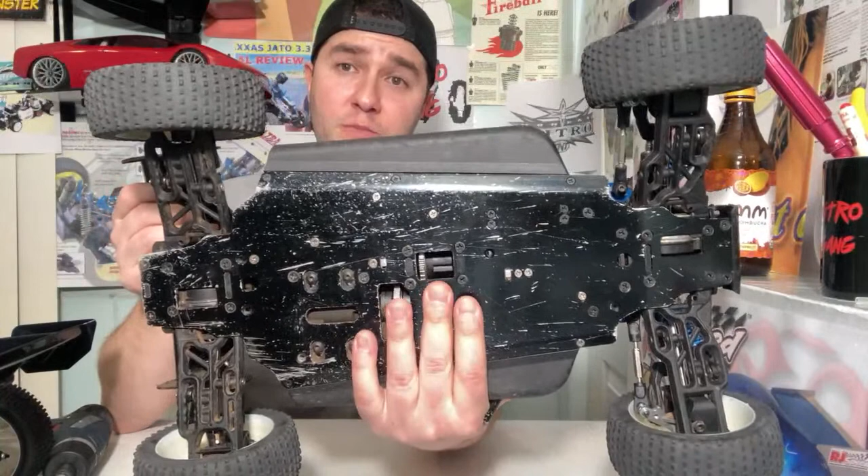So check this out, one interesting thing I noticed about this XTM: it does have the regular pan chassis, the metal spur gear, stuff like that. It also has a locked center diff. So if I spin the rear wheels, take a look at this, the front spins along with it. Right now I didn't do anything to this buggy since I got it, but I actually think this is going to be the first Nitro buggy with the center diff that's not going to piss me off. I sure hope that is actually the case here.

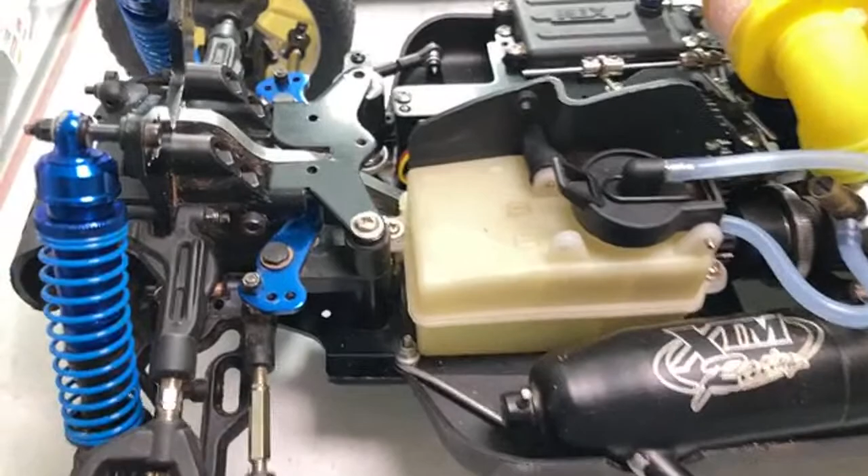Okay guys, so this is a fairly rare, at this point, XTM X-Terminator XT2. Notice it has a ton of aluminum all over. We have a very, very thick front aluminum chassis standoff, a stiffener, whatever you want to call it. I don't know what you call it. We have an aluminum steering link, metal spur gear as expected. The XTM...

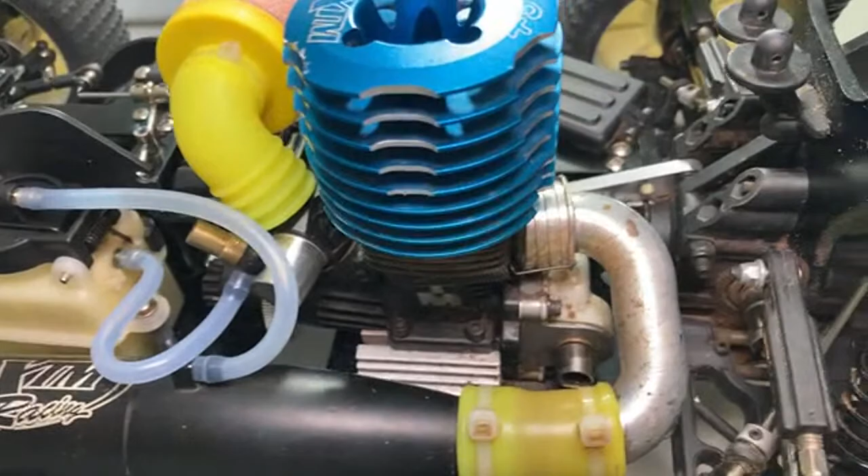451 engine. Now guys, I was doing some research on this motor, and I actually have a tab open with the horsepower. So if somebody wants to take a guess how much horsepower this XTM has, we're going to find out in a little bit, but we're just doing a little overview of it right now.

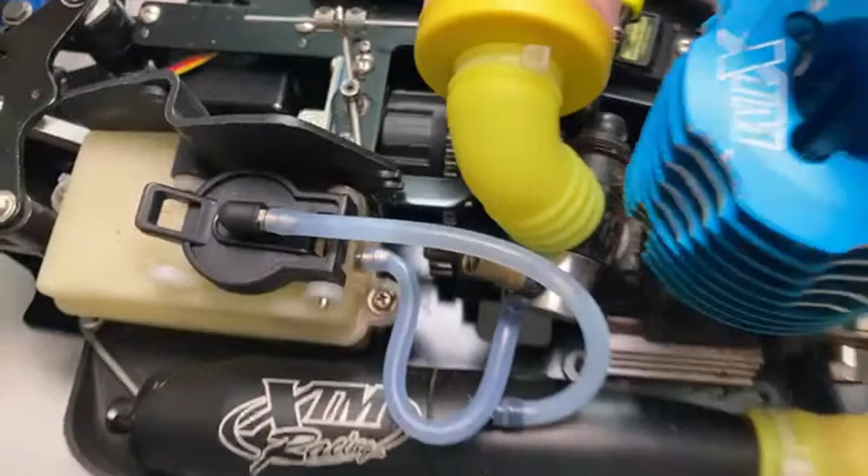Okay, so guys, top-down view. Sickening, look at that. We even have another giant metal chassis standoff here in the back. So if you're taking those sickening jumps, your chassis doesn't bend, right? What I really like, and if you look at the back, the body mount has two separate body posts.

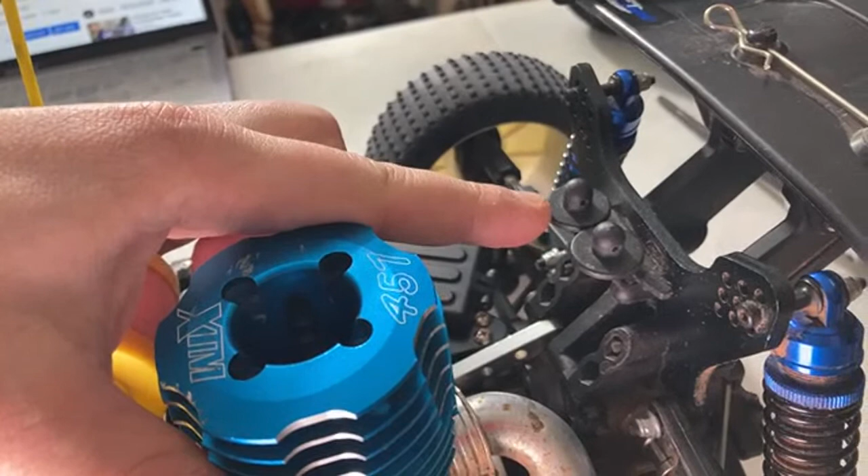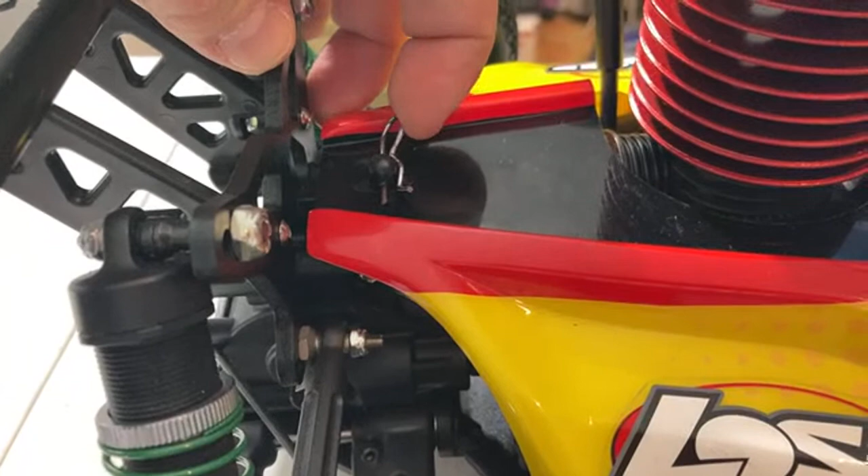This is really, really, really nice guys. I got to tell you, because the LOSI buggy honestly kind of pissed me off with the way the body mounts - once I said this body mount is hard to take off. Body post is hard to access because they should have made it a horizontal mount here. But then this dude told me that if you put the body clip this way, it prevents it from popping out. I don't know how accurate that is because honestly, what is going to be hitting the body clip here in the back?

Like, I don't know. Anyways, the question was, how much power does this XTM 451 engine have? Okay, so I already have one good answer here from Tim Raz.

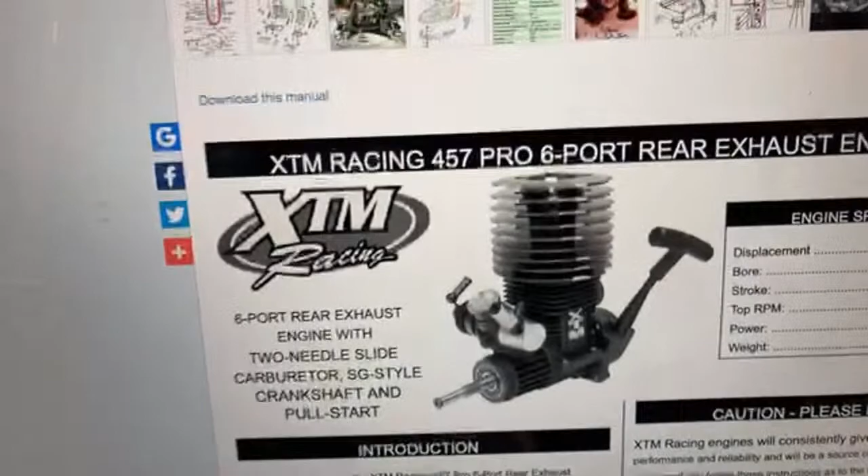Tim Raz has very good and proper Google skills. So let me pull it up right now. I already have it open, I think, somewhere. Okay. I'm going to open. So this is the XTM Racing 457 Pro 6-port rear exhaust engine. This is the same exact one we have.

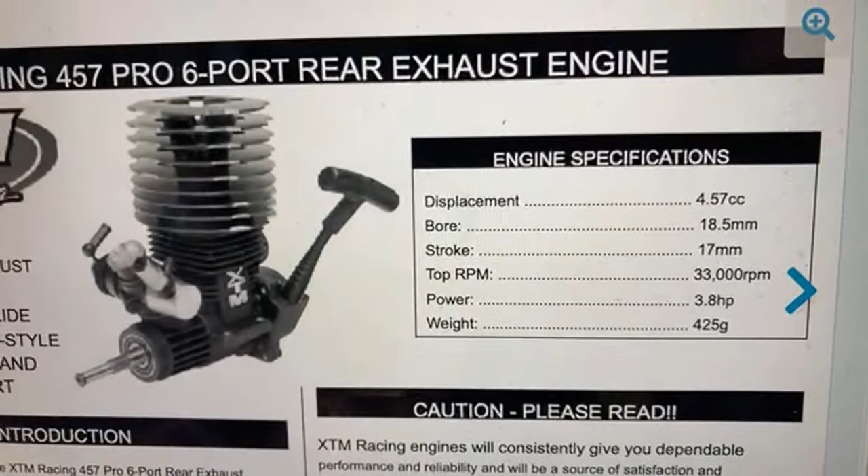Guys, check that out. 3.8 horsepower. It's freaking insane. 3.8. You understand that this .28 XTM 6-port has more horsepower than the Savage XL K5.9? Yeah, it does. 3.8 horsepower, my dudes. Okay? From this XTM.

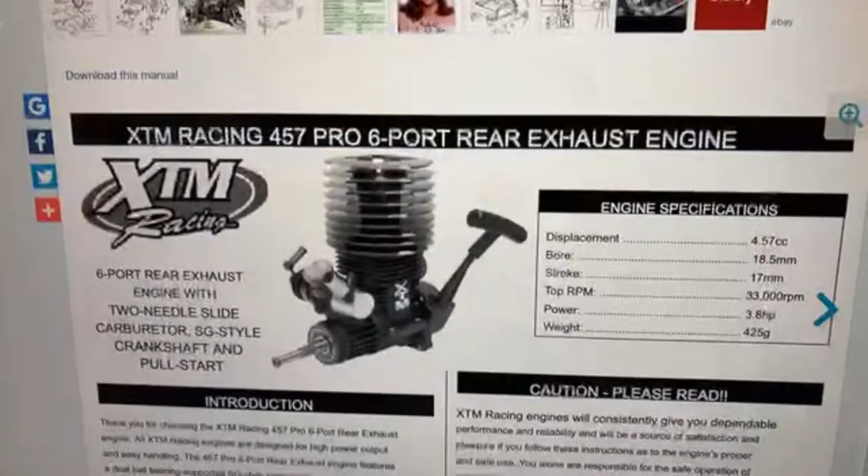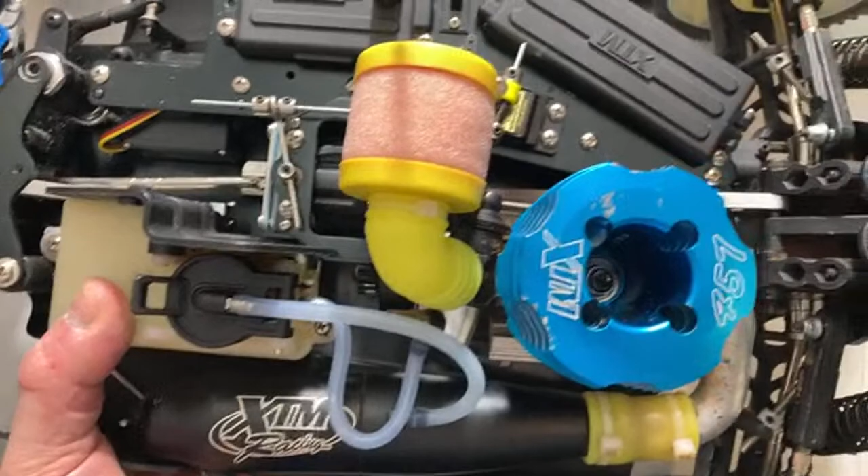It's actually quite sickening. This is the same exact engine, I'm sure. I looked it up, I had some more information about it, but I don't know how much it was at this time. But 3.8 horsepower, guys, more than the Savage XL of the time, which was a .36, right? So the Savage XL is a .36 engine, and this is a .28.

Okay, so let's go over to this side of the chassis now. It's basic buggy stuff as you would expect to see, all sealed stuff like that, a lot of hardware. Obviously adjustable front and rear brake bias as expected. You have very thick looking front and center driveline shafts. Metal outdrive cups. Sickening. All right, obviously standard 17mm hubs.

This one has upgraded high-tech servos. I think for the time, I'm not sure what the servos in these were. But we got a good comment here, I'm going to read it from 1541C. He goes, same engine as the X Factor.

So the X Factor is honestly one of the Halo trucks that I want for this channel. It's a solid axle monster truck, right? But this is a solid buggy, my dudes.

The only kind of weird thing I'm going to show you right now, the suspension geometry on it is a little bit weird. So if you look from the front guys, like the wheels go so sideways. The bump steer, I think this is called bump steer, right? It's quite sickening.

Yes, Eddie Chan goes, chassis-wise, they all look the same and similar. I totally agree, man, I completely 100% agree. I'm trying to do a good overview for the buggy fans, but deep down, they're all exactly the same. It comes down to the thickness of the shock towers. It comes down to gearing. It's basically all exactly the same.

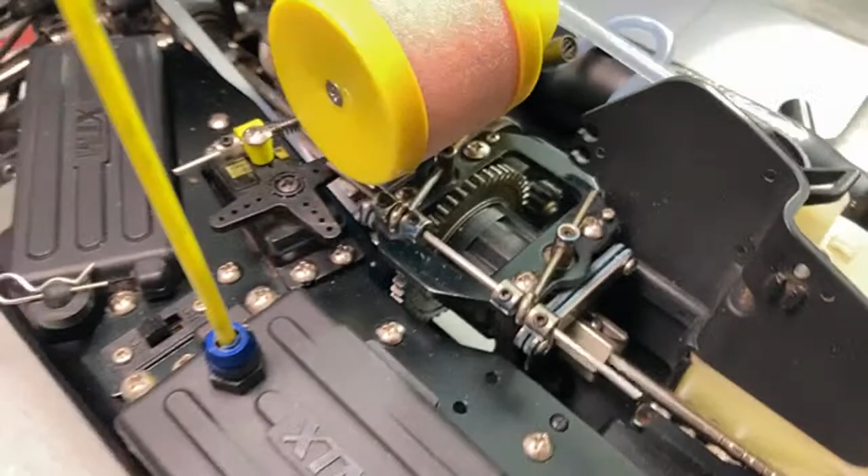This one has a lot of nice metal upgrades. The LOSI actually has almost none of this. But I'm thinking we're going to be running this one soon. So if you guys want to see me run this, you let me know, because Nitro Buggy Day, okay?

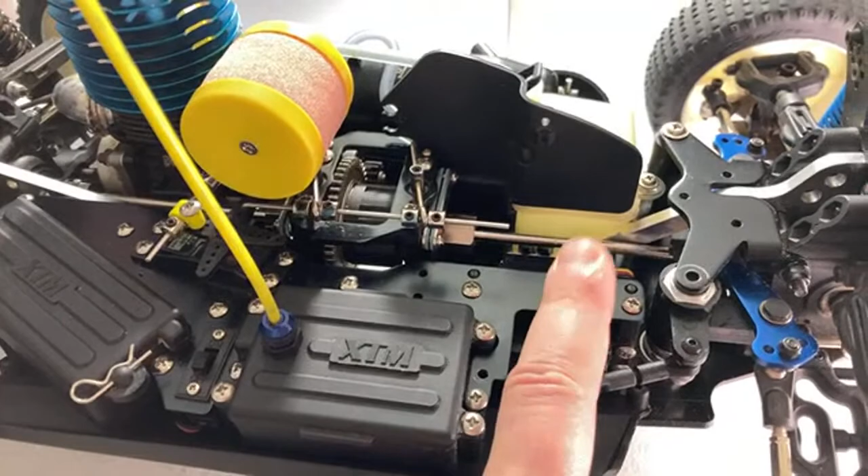Let's take a look under the air filter. So we got a giant freaking carb over here. This is a fairly large carb. It's clean inside, it's not seized. All right, sickening guys, all right.

Let me make sure I put this on well.

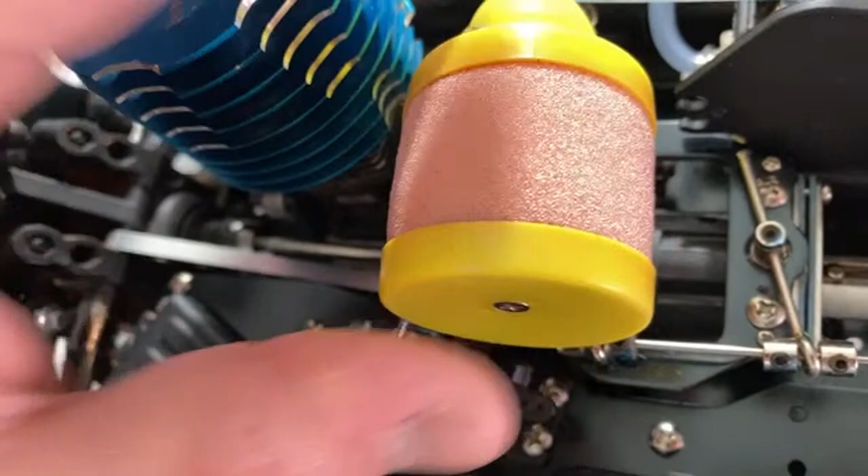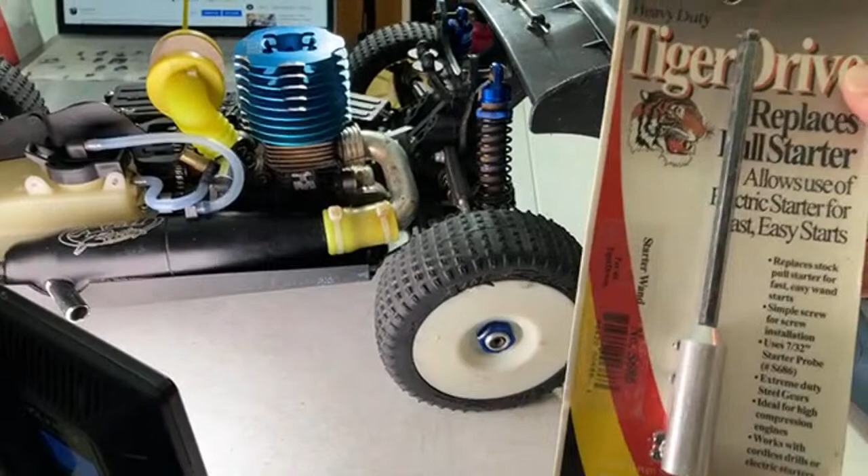XTM pipe. Now let me show you the starting mechanism on this car. So this has the Sullivan Tiger drive. You know, it's gonna be a little interesting. Let me show you what the thing actually is. So this is an adapter for the Sullivan. Sullivan is the brand, right? They're calling this the heavy duty Tiger drive. It says replaces pull start, allows use of electric start for fast, easy starts.

Okay, so boom, there you go. You basically just need to insert some hex Allen piece into here, and then you could put it into the chuck right here. Anyway, the only problem I see here is this exhaust is mounted almost in the direct path of the Sullivan Tiger drive, which is the back plate, right? That's the back plate. That's what they call it on this XTM buggy.

Okay, so does somebody want me to spin over the motor right now with this drill? Should I do it? Or should we first remove the cooling head, take a look inside? You guys let me know. Yeah, let's probably remove the cooling head. All right, I'm gonna put it out to a vote right now. Remove the cooling head on this 3.8 horsepower XTM, take a look at the ports, or what? This is probably an engine that almost no one's ever gonna see in their life.

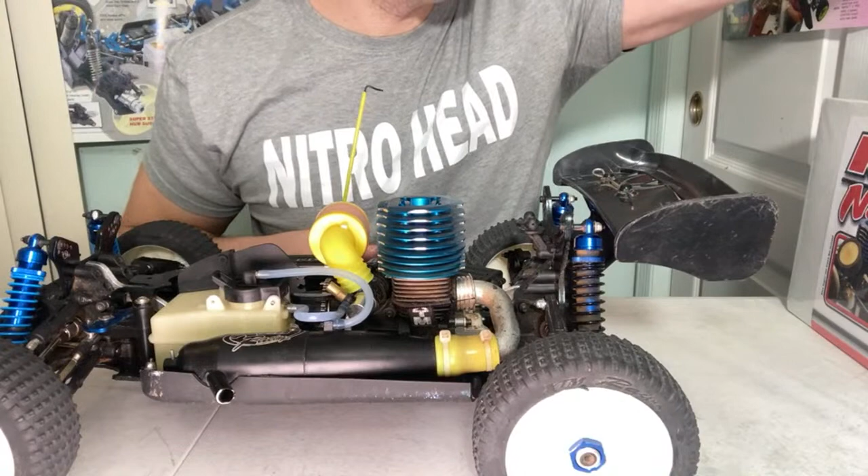All right. Okay. So let me give you a good position view here. Then we will do it. All right. Let's get on it. Let's see which driver this is gonna be. All right, so these are 2.5 millimeter drivers. Not bad, pretty much as expected.

All right guys, okay, we're going to take a look inside. First we got to remove the cooling head. What's up Tarek Curry, how you doing bro? This is a super rare XTM X-Terminator buggy, bro. Okay, XT2, okay, we're gonna see what's up with the nitro motor right now.

All right, let's do this. All right, I'm gonna remember the way that this is oriented. So this is - oh, Benjamin Martinez with a $10 donation, he goes, keep Nitro alive. Thank you brother, I'm happy to have you here as a longtime member and supporter of course as well. All right, so

This will be the next buggy that's going to get run on this channel, guys. So what we're doing now, we're checking out the motor. Actually we should probably take a look in the fuel tank. Okay, the fuel tank is, we're gonna take a look, we're gonna take a look. Hold on, I'm going to adjust some of this lighting.

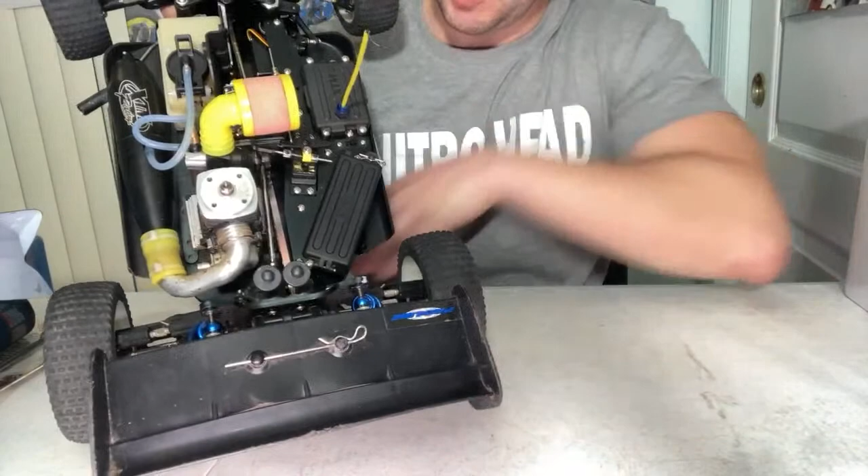All right, that should be okay. Okay guys, I can remove the head now. Should we do it? We're gonna do it. All right, we're at 130 viewers now. All right, so far so good. The head is removed. This is like a two-piece head design, this is called the head button, right? Almost all 1/8 scale motors have this, so this is not surprising. I'm going to hold it like this, and we will get a very good view inside the motor.

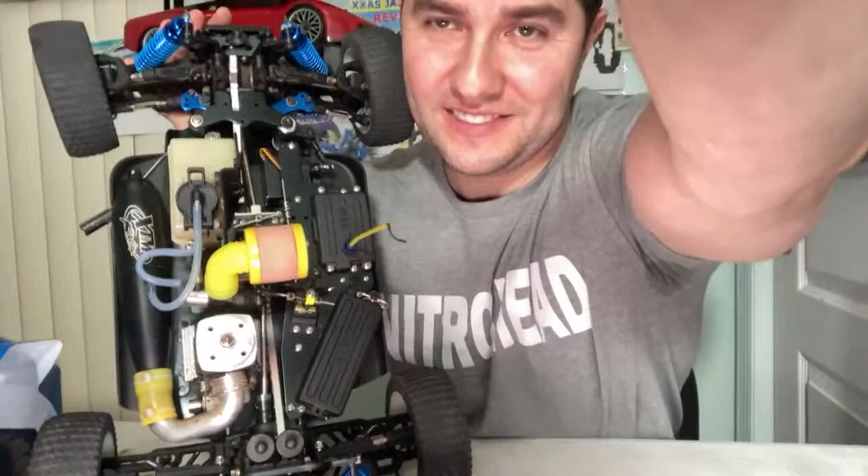All right, you guys ready? All right, let me make sure the view is quite good. Okay, so you should be able to see like this quite well. I have like a whole bunch of light on it right now. Okay.

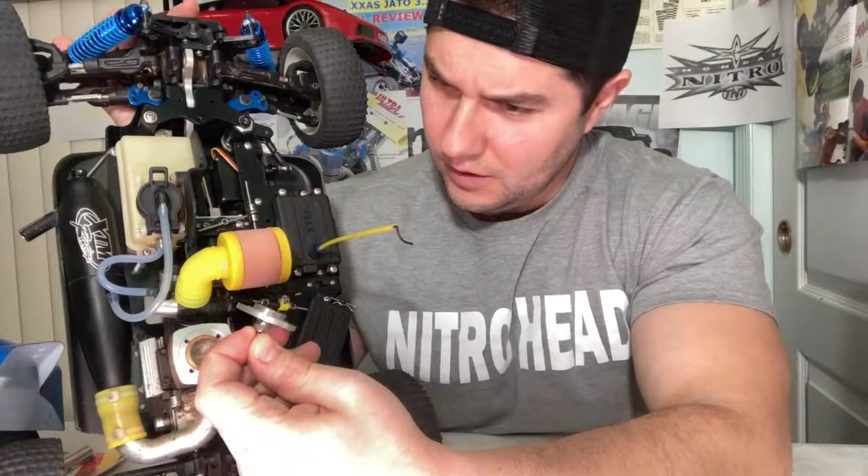Nice and clean. What do you think about that? So we're gonna take a look inside the cylinder. It's fairly dry in there, but it's okay. I'm gonna spin the flywheel here with my finger. Hold on guys, so it moves, right? Yeah, it's on the dry side, but it's clean. It's sickeningly clean right there. It's not bad, this could have been much worse.

Okay, 3.8 horsepower on this. So let me put a little bit of oil in there.

Oh man, I see a ton of ports. I think you guys should get a look at this. So how many ports did I say this was? 6 port? Okay, let me count. 1, 2, 3, 4, 5, 6. I legit counted 6 ports. I'm going to give you a good look at it right now.

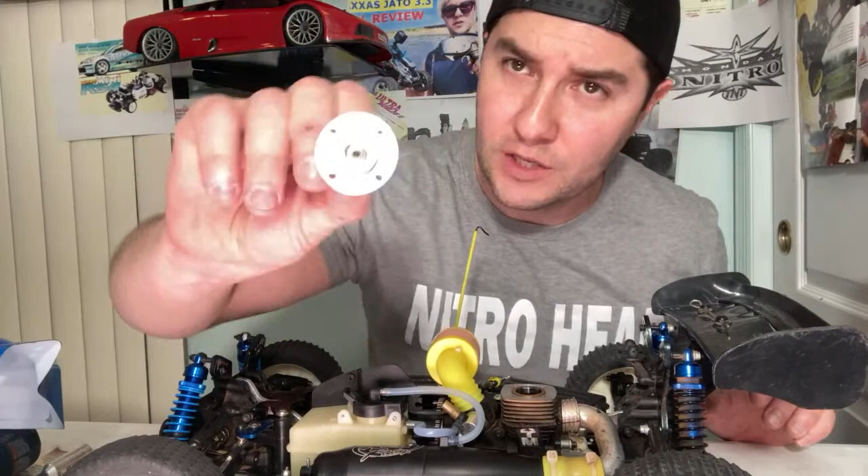Hold on, this is actually a little bit interesting. Is this a turbo plug? No, so this is a regular plug as well, which is good. It's easy maintenance, okay.

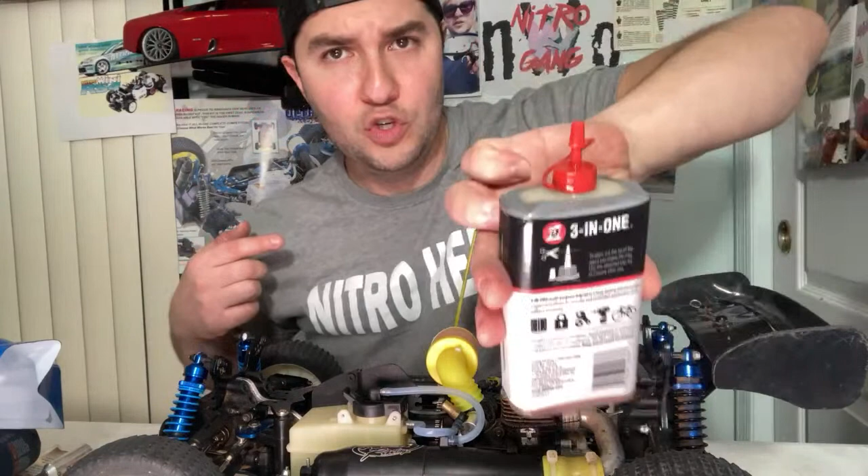Let's take a good look inside. I'm going to put some oil in there, and we're gonna check out a 3.8 horsepower, freaking sickening 6-port nitro motor. Okay, let's make it happen.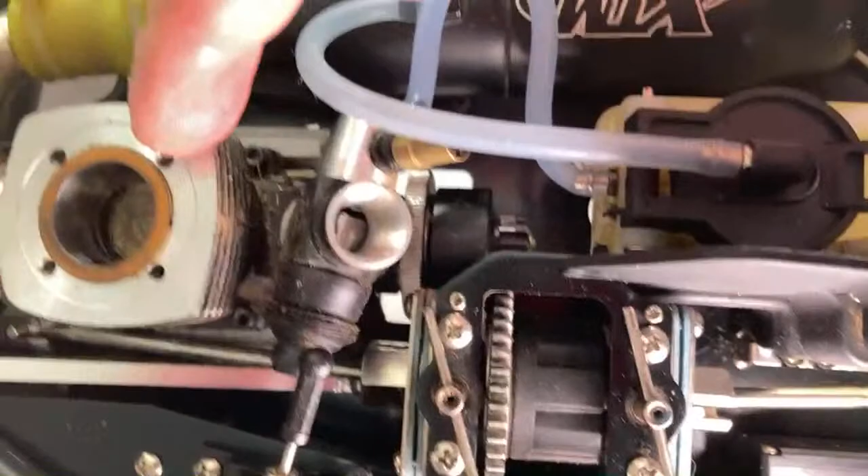assemble it back. Craig Dickerson here with a very good suggestion, he goes, drop some into the carb. Very good idea, I forgot to do that. I normally do actually do that, okay? So I did hear the oil make noise. All right, let's drop some into the carb.

All right, that's fine, and I'm going to spin it over again. Yeah, perfect. I hear it. All right, so that's good. We're going to assemble the filter back.

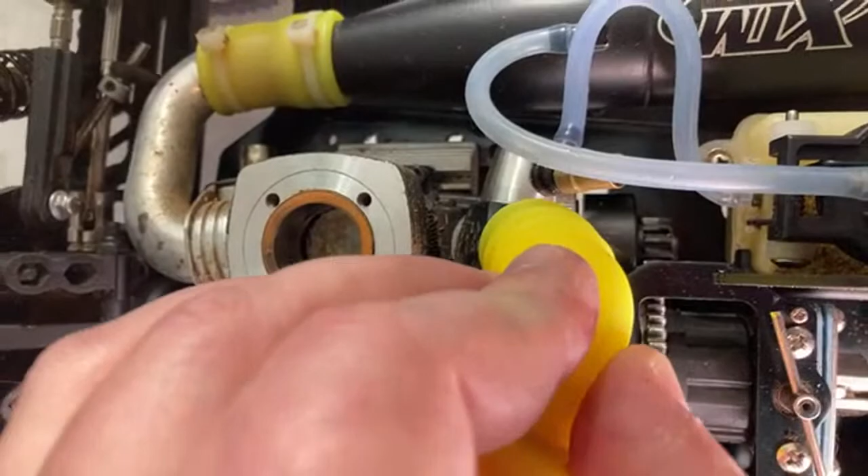Guys, this is probably one of the most high performance engines that anybody could have, you know. 3.8 horsepower from a 0.28. You gotta understand, 451 translates to a 0.28 size engine, all right.

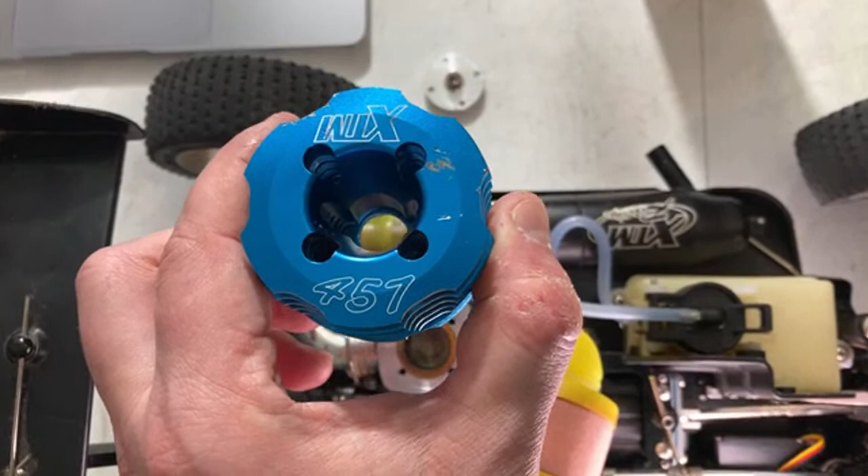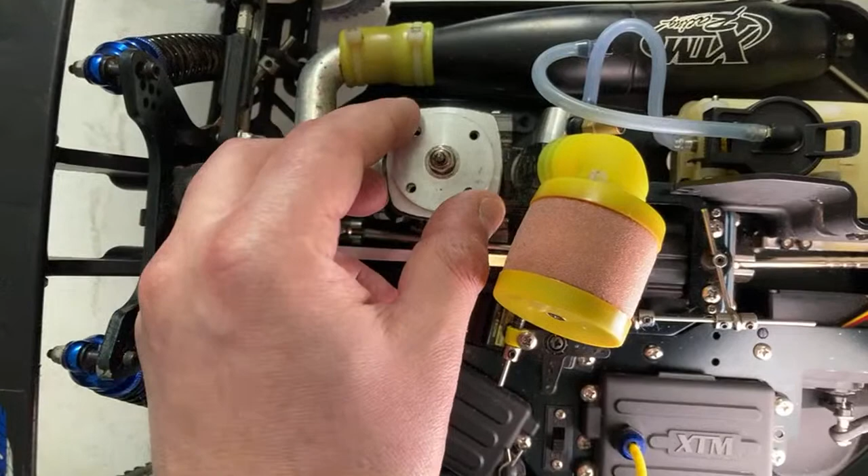Head button looks normal, glow plug is fine, so we will just put it back. And then really the way to check the compression would be to assemble the cooling head back in, and we will check it out. Okay, let me put this back on for a second here.

Okay, we're doing a little bit of maintenance right here, guys. Probably a motor that no one really knew much about outside of the XTM segment. Actually, someone did mention before this motor came with the XTM Mammoth, which hit over 50 miles per hour, a 2-speed nitro monster truck.

So let me put the head back in. Then we will check the compression by spinning over the flywheel there. Okay.

So let me do a little bit of busy work right now, guys.

So glad you guys like this. This will be the next buggy that you see run on this channel. So far, we had the OFNA Ultra LX, Ultra GT LX, we had the LOSI 8, right? And then we're gonna have this sickening thing right here. This is probably gonna be the most sickening one, just so you guys understand. But the thing is, I don't really have much.

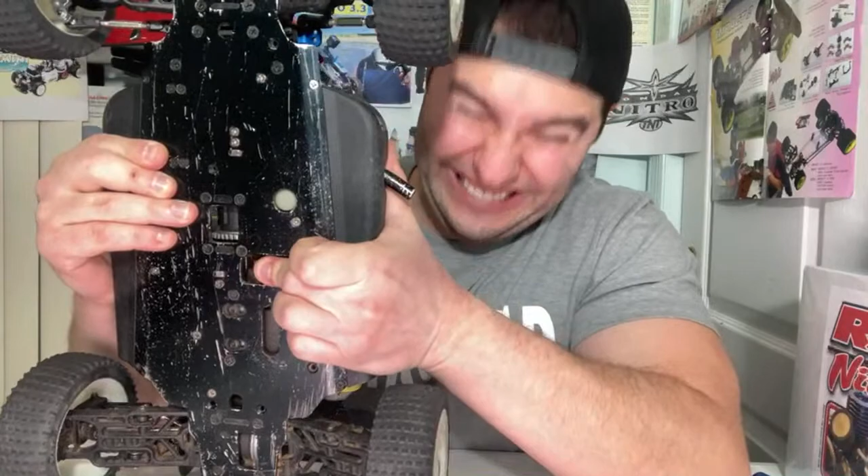All right, so we're going to take this, turn it sideways, and I'm going to spin this over. We'll just listen to whether I can spin it over normally with my fingers. All right, guys, I can't spin it over at all. It's sickening compression. Okay, I'm going to hold it this way. I can't turn it at all. Ugh, can't turn it at all. So we got crazy compression. This motor is like new. I'm going to try again. Can't turn it at all.

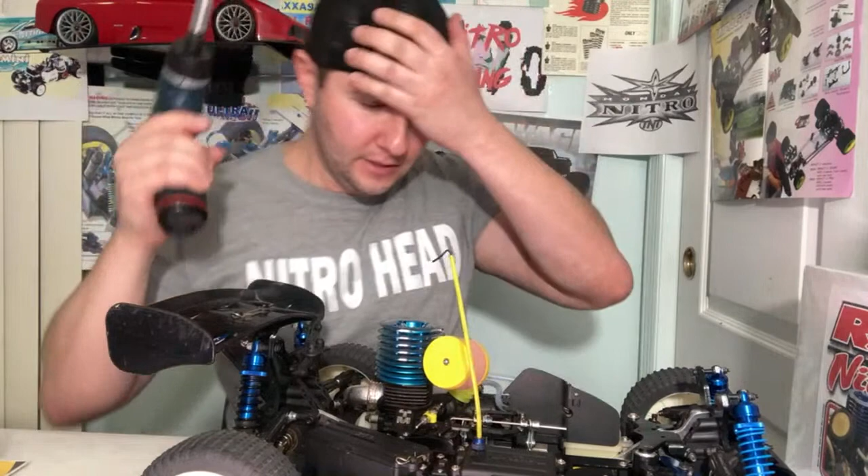Okay, we're going to use the help of the drill. That was... I've never met a motor that I couldn't spin over the flywheel with my finger. It has never happened, okay? Usually it's quite hard, but I have never actually given up.

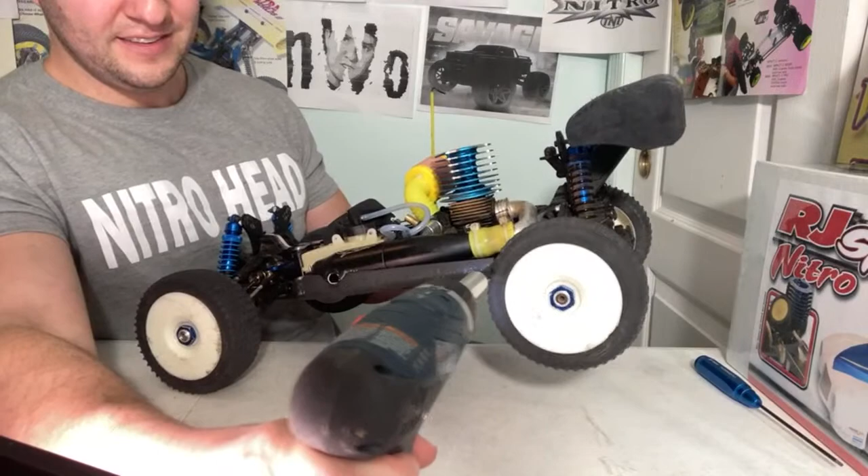All right, so we're gonna do this. I'm gonna adjust the lights. So the Sullivan Tiger Drive, that's what we got on the side. It's not a very good access position. I will confirm that it's freaking in the way of the exhaust header. All right, you guys ready? Sickening, listen to that.

What do you think about that, my dudes? All right, so let me get the flywheel as close to bottom dead center as I can. Okay, I think that's about right. All right, so this is gonna be amazing, guys. All right, this is gonna be amazing. So the motor feels very free.

I just need to clean the fuel tank a little bit. Let's see, should we take a look inside the fuel tank right now? Should we do a little bit of maintenance, guys? I don't know, while we're here.

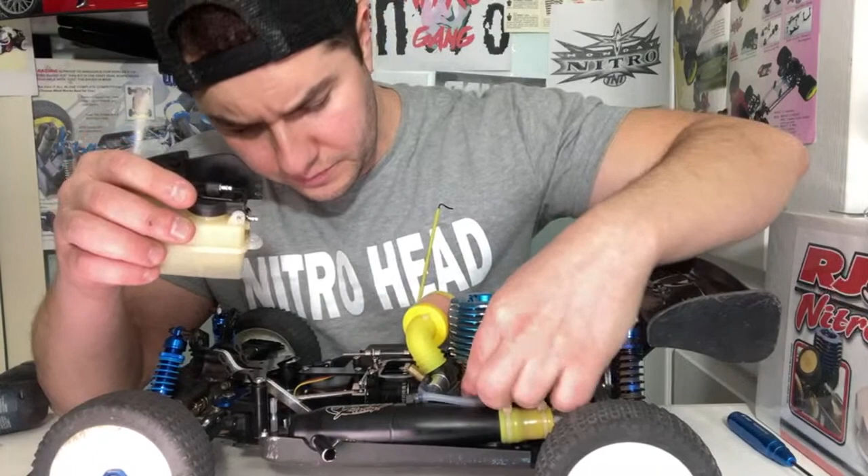All right, let's remove the fuel tank, we'll take a look inside. So whenever you're trying to start up older nitros, take a look inside the tank, make sure it's not dirty. All right, that's what we're doing today. So let's see what we got. Fuel line, I'm going to remove the fuel line, and I'm going to remove the pressure line. I'll leave these here for now. The question is, before we look at the tank, it's quite sickening inside. Oh yeah, John Sims, yeah I tightened it, yeah I tightened it.

Let's take a guess how many teeth this clutch bell is, because it's engraved. How many teeth you guys think this is? Man, this is probably going to be one sickening fast buggy. So with the fuel tank out, you can see the aluminum chassis standoff, and honestly, the machining work is very nice. You guys see that right there?

So how many teeth? Nitro Mark goes 16, Terra Curry goes 17. I just counted. Sean Q here with a crazy high number, Sean Q says 21. Man, I wish, because then this would hit 88 miles per hour, send it back to the future, you know what I mean? This is a 14-tooth clutch bell. Normal. That means if you want to go higher, you got no problems. You got tons of speed left in this thing.

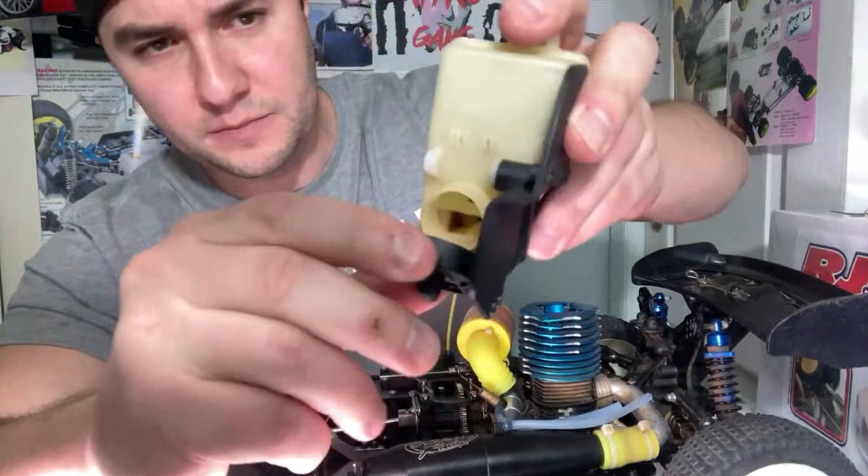Okay, so the fuel tank, let me take a look inside myself. It does have a fuel filter. All right, so take a look inside, so this is it. It does have a fuel filter there on the bottom. I know it's a little tough to see, but it does have a fuel filter, and also has what looks like green moss on the inside. So I'm going to wash this out in the sink with soap and water after.

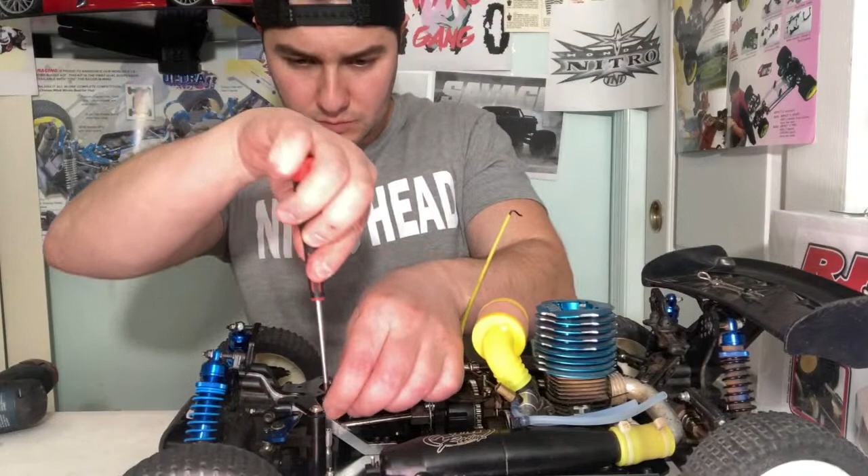And then in the next video you guys see, I will be starting this XTM up. There's just no other way around it. So for now, I'm going to do this, I'm going to just temporarily put back the screws. I'm going to wash the fuel tank separately on my own time. Oh, get back here, screw. All right.

All right, the question is, do we want to check the electronics? You guys think I have the original radio? Who thinks I have the original radio? You let me know, do I have the original radio? Well, do I? Of course I do.

Derek Zanny goes, is that an XTM X-Terminator? Yeah bro, XTM X-Terminator XTE2 with a 3.8 horsepower, 0.28 XTM 6-port sickening engine with crazy compression. Compression tries to kill you.

Okay, so this is the original radio, Airtronics. It is a 2.4 gigahertz Airtronics unit. Quite sickening. It looks like the old design, but that's probably just because they did not update anything about it at all. They were making these radios for super long, but they're very good. Although I will say the digital display system is a little annoying to use. So let me power it on. So we got power, right? We got LEDs, look at those LEDs. All right.

All right, let me put this thing away now. If you guys have any final questions, I'll answer them, but this is going to be the next buggy we're running on this channel. I said I was going to get buggies, and I got them. You don't even have to buy any, I'm going to buy them on my own. But if you want to buy one, like a LOSI buggy or a truggy, there's a link in the description to this video for both. Get one, they still run really great.

And now, do you guys want to take a look under the cooling head here? I like looking under the cooling head, guys, I don't know what to tell you, I like it, it's one of my favorite things to do. We're not going to make a girl analogy because that could go a little crazy.

Okay, so I'm going to seal this up. Sullivan Tiger Drive. Guys, nobody has this kind of stuff on their channel, nobody, okay? I was wheeling and dealing to get this. You see that? Sullivan, all right.

Now, where are my body clips? One of the really cool things on the back of this thing, check this out. This is a long body clip, right? You see this body clip right here? It's like a long body clip. The body posts in the back, guys, there's two of them, so you have very good distribution.

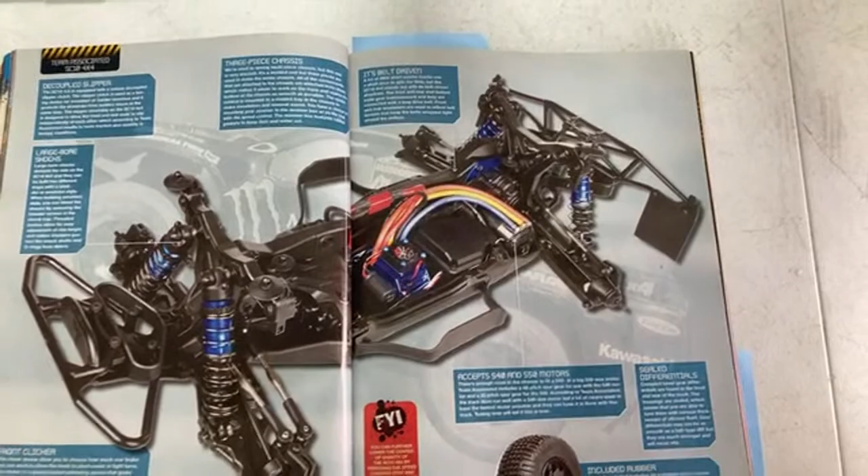All right, I mean it was good. I remember running against these guys like long ago. They were very good, okay. They were just as good as any short course truck really, but a little bit better because it was team associated, and usually those guys had very good electronics.

So we have a Kyosho DBX 2.0. I have this actually in the box, brand new. I was going to unbox this in today's video, but I changed my mind. All right, so we're getting to the feature.

Okay, this is what I wanted to talk about. The XTM Nitro Rail. It says, a basher nitro buggy with the looks of a glamorous dune buggy. Oh man, what do you guys think about that? XTM Nitro Rail, it's called. So it was $499 - you know, once again, they were expensive for this time period. And it's basically a 1/8 scale buggy, similar to the Ofna Hyper Cage, or should I say the Hobao Hyper Cage, or just the Hobao Cage, I don't know whatever they call them. So, you know, XTM was doing stuff that Hobao thinks is cool today. XTM was a front runner, all right? They made things before people even knew they were cool. Mark Brennan here with a question, what year magazine? This is 2011.

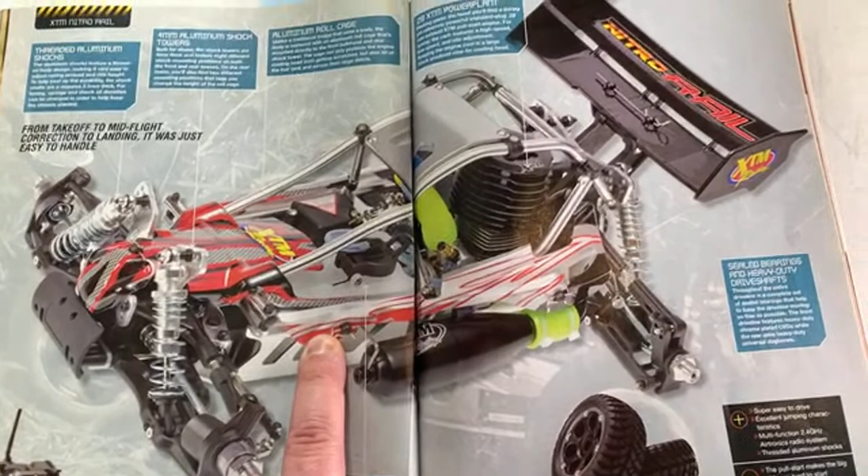I gotta tell you, this is a good-looking buggy. It's kind of like the Baja. What's great about the Baja is you really don't have to remove the body to do anything.

So we got the Airtronics radio, which is the same one our XTM has. I showed you guys this just now. We have threaded body aluminum shocks, 4mm aluminum shock towers, and an aluminum roll cage.

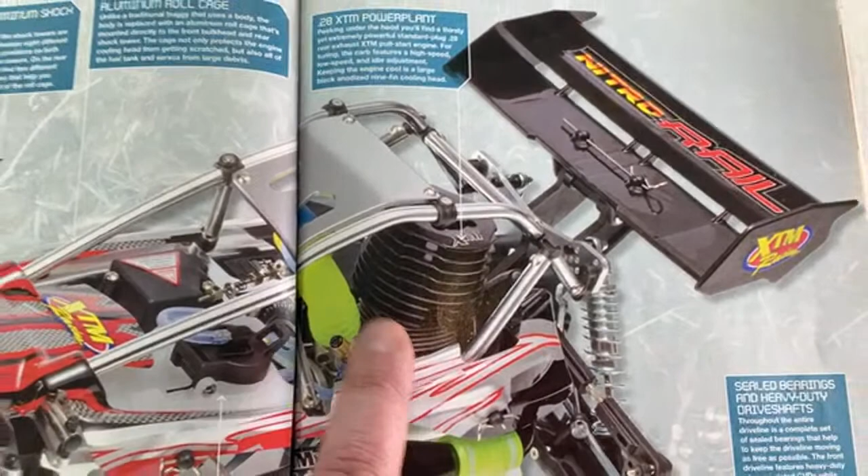A 0.28 XTM Nitro motor. I don't think this is the 6-port, right? This is probably just a regular 0.28 because the block itself isn't the same color. This is definitely not the 457 motor, otherwise it would say 457. Like, why wouldn't they? Let's see.

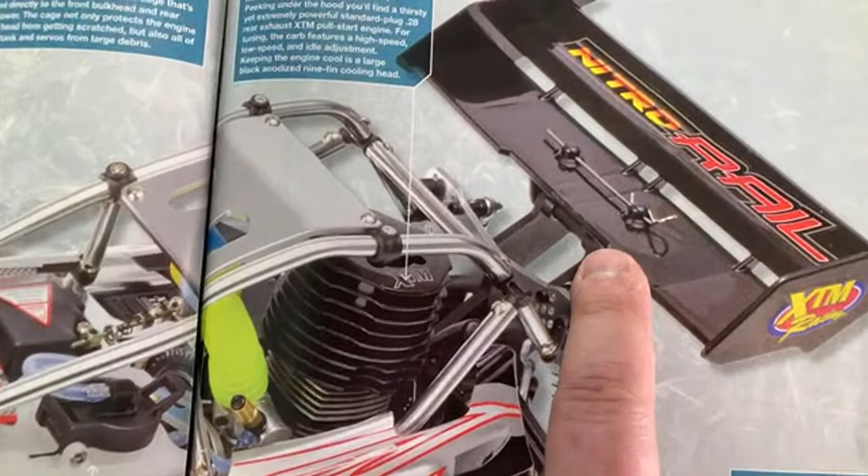Yeah man, sickening. I also like how in the back, check this out, they have one body clip - this long body clip for the entire wing. Very nice, man. XTM was, honestly, they were sickening.

All right, so what do they like about it? It says super easy to drive, excellent jumping characteristics. Now what do they not like? The pull start makes the big 0.28 very hard to start. Well, they probably don't know much about sickening compression. Haha, I'm just playing around.

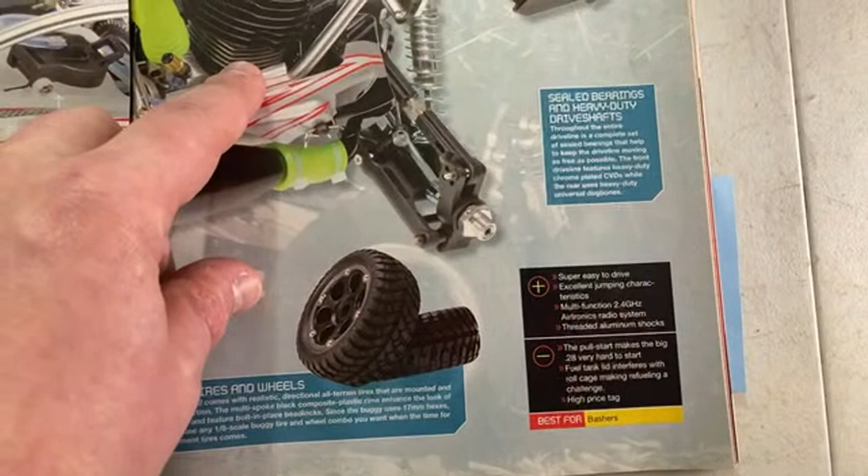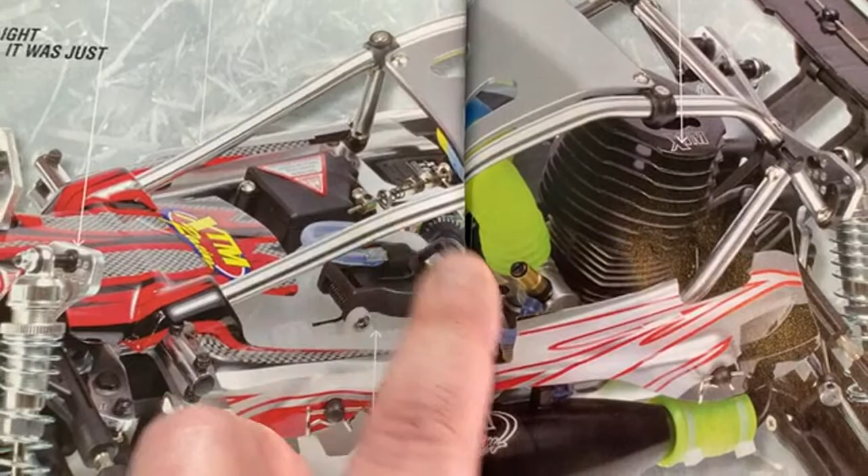Fuel tank lid interferes with roll cage, making refueling a challenge. High price tag. Yeah, I could see what they're talking about. So the fuel cap lid is literally in the way of the roll cage. So that's actually a problem right there. That's a problem and a half.

Let's continue, so this is it in action, right? Pretty nice chassis setup, I gotta tell you. It looks like the front is already diffed out, so it looks like center diff trying to kill the wheels here in the front. Cool RC for 500 bucks, I don't know.

Let's see what they wrote about it. They said it's a little thirsty on fuel, but the ear-to-ear grin I got from grabbing a full helping of throttle is well worth the price of admission. Yeah, sickening. So they're saying that the .28 is a gas guzzler.

Yep, it's diffed out. By the way, look at this Tower Hobbies ad for the Thunder Tiger MT4. Thunder Tiger was never really a popular brand here in America, I'm surprised this was in the magazine. Anyways, XTM Nitro Rail - XTM was doing things their own way. Unfortunately, they were making them too expensive, and hobby stores weren't having it.

Let's continue, what else we got over here. So here we have top 25 pit tips. Whatever. Also whatever. More whatever. And we got a guy on a couch.

This is a Duratrax ad. Looks like a guy on the couch with brand new Nike Air Max 2011s. These are actually very expensive shoes, I had them. He is proud to have this electric piece of crap Duratrax on a couch with him.

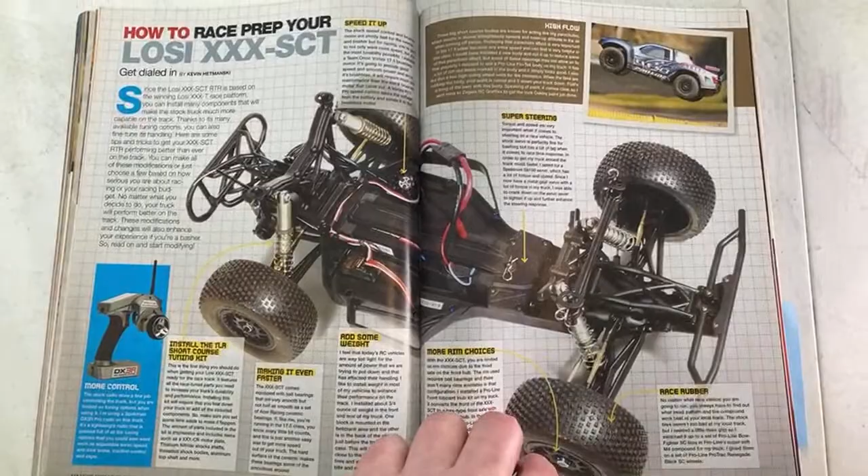Anyway, let's continue, talking about slipper clutches - something the NitroGang doesn't know much about. Okay, let's continue. They got the LOSI XXX SCT. Some battery stuff here, max amps, I remember those. And we have a Tower Hobbies circular thing going on. Let's see what we got.

Well, you know what? I'm not much in the mood for this right now, so I'm just going to continue. All right. Strike Team Sidewinder Purple Fuel, pretty cool. Electric Challenge, don't care. Let's continue.

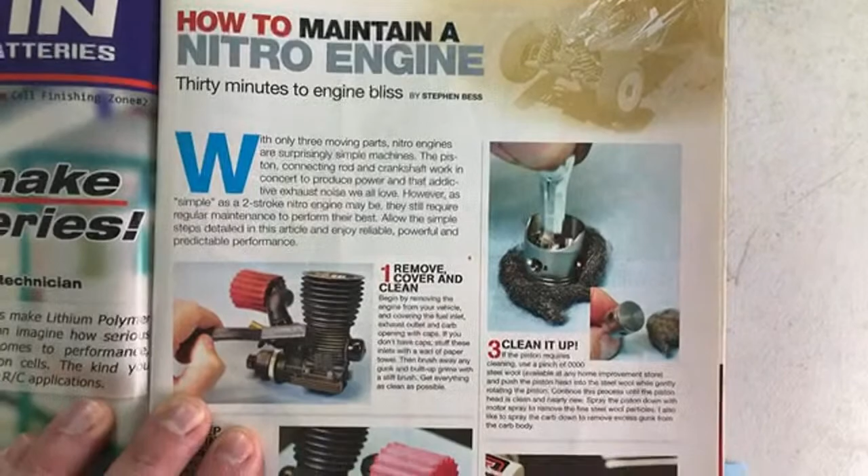They got how to maintain a nitro engine. Well, this is interesting, let's see what they're talking about. Number 1, remove cover and clean. Cover? Are they talking about the cooling head? Why would they call this the cover?

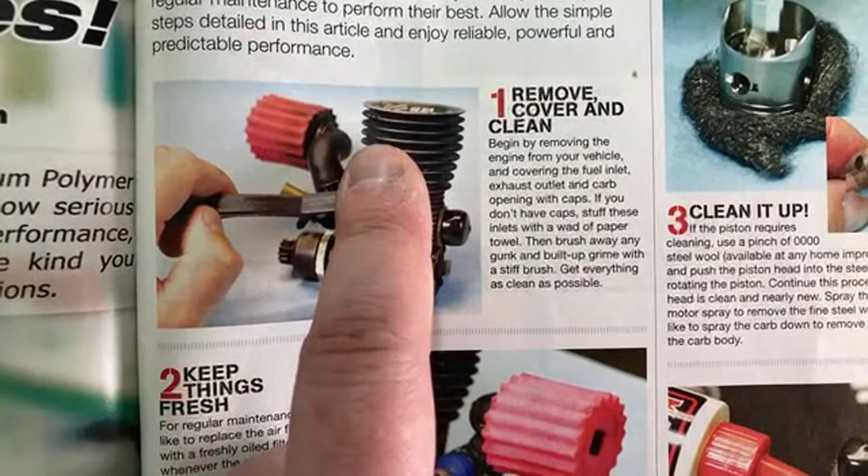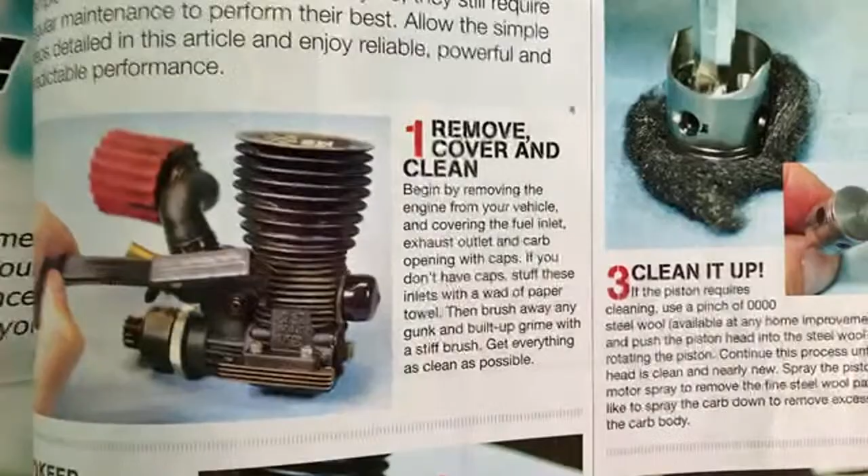Let's see, brush away, remove cover. Oh, no, hold on, no - it's remove, comma, cover, and clean. Yeah, they're right. So they're saying to plug the exhaust so you don't get dirt into it, or like the carb. That's a good idea. Yeah, that's a good idea.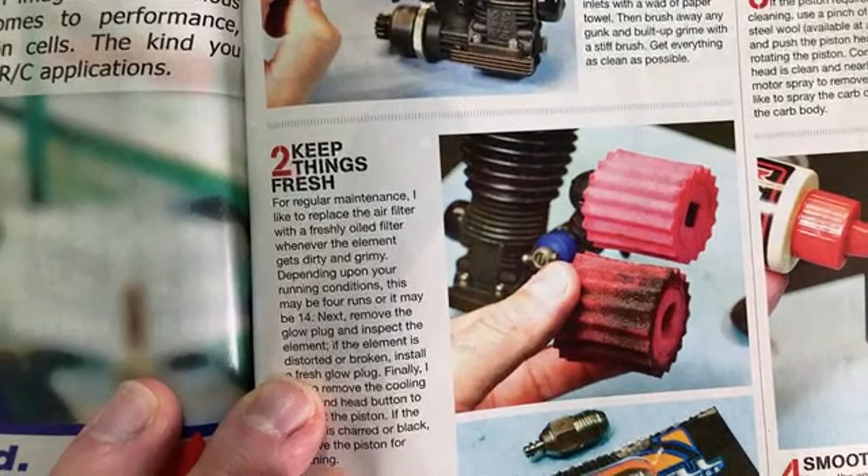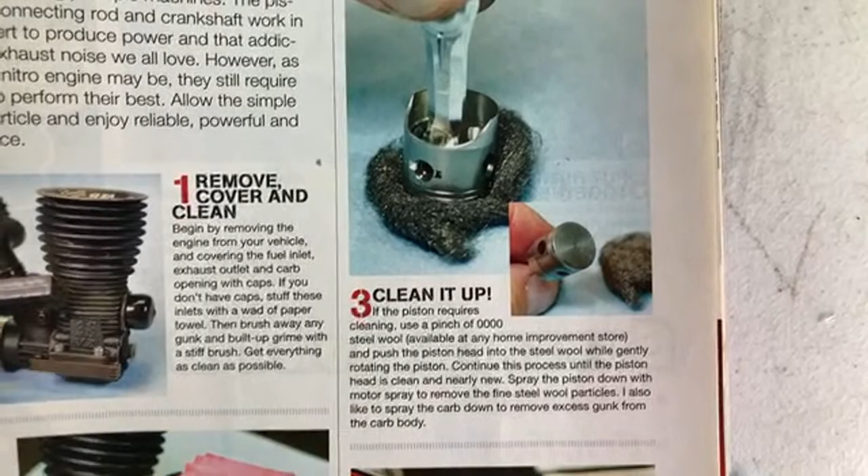Number 2, keep things fresh - so air filter foam makes sense. Number 3, clean it up, and so here they're removing vital engine components. I usually do not remove the sleeve of the piston like this because more disassembly than needed is not really a good idea. We got smooth operator.

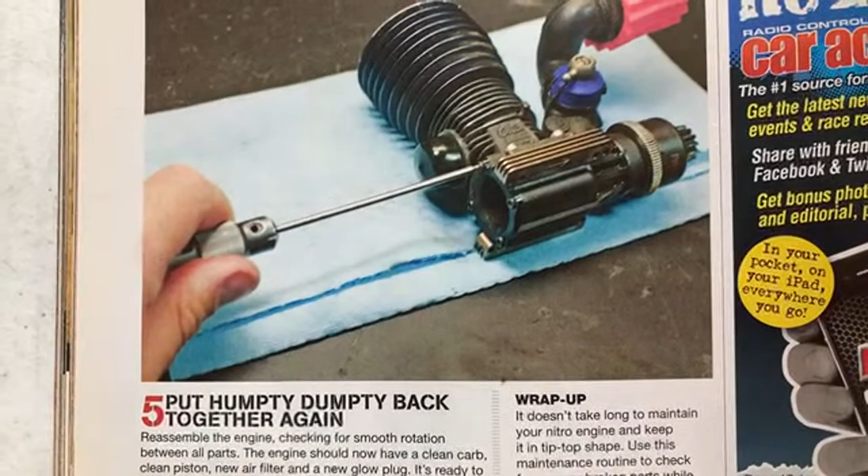Right, so add oil. That's right, that's basically what they're saying. And 5, put Humpty Dumpty back together again. Well, don't call Nitro Motor Humpty Dumpty, bro. Just don't do it, that's not what it is. It's actually not even funny.

Oh, check this out, we got an ad for the Tiger Drive. What do you think about that, guys? This is exactly what I just showed you before, right? That the buggy I just had right here, you see that? This is why you gotta love vintage RC magazines, guy. Well, I don't want to call this vintage, but basically we got a Tiger Drive in the reel right here, guys.

All right, let's see what else we got. That's basically it, all right. That's about it, okay, let's go back to me right now.

So we're still on the subject of this. I'm going to be removing the cooling head. We're going to put some oil in it, but need a small little break here. We will talk about, let me load some stuff here just so I see what is going on. Give me a moment here, guys.

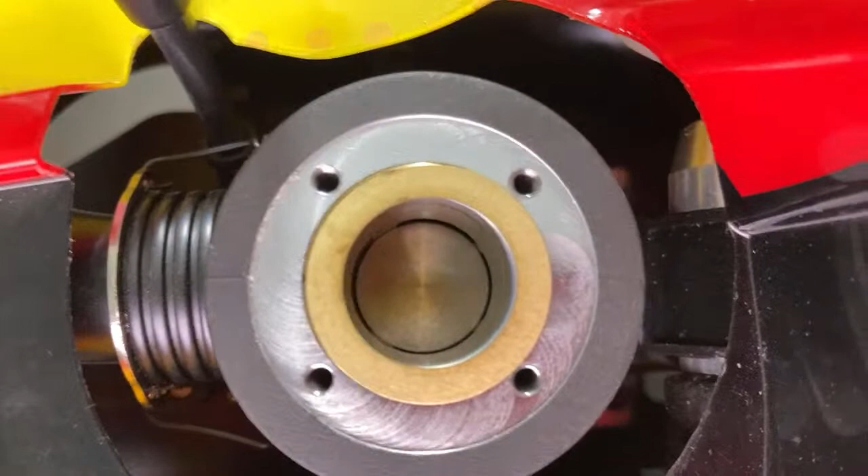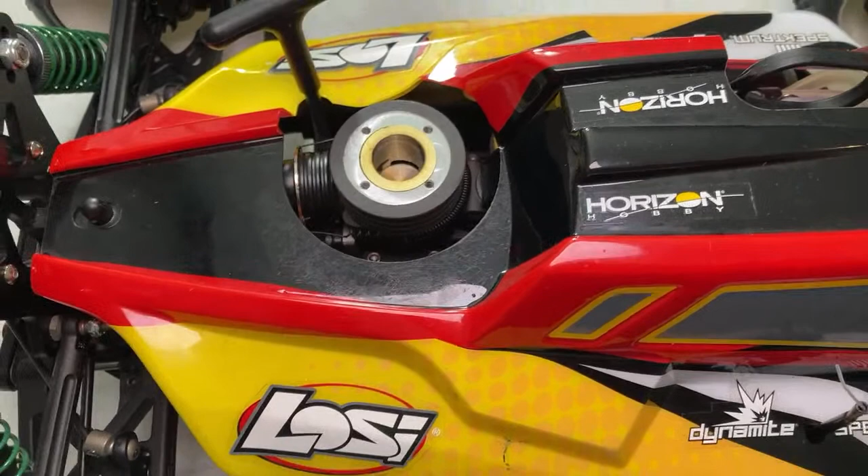So the port in the back is the exhaust. If we count, we got 1, 2, 3 ports baby, so we got very low ports but 3 is all you need, you know what I'm saying. So the motor is very nice, it's a very nice motor. If you want to get one of these, they're highly reliable, they start really great, and they're only $95, guys.

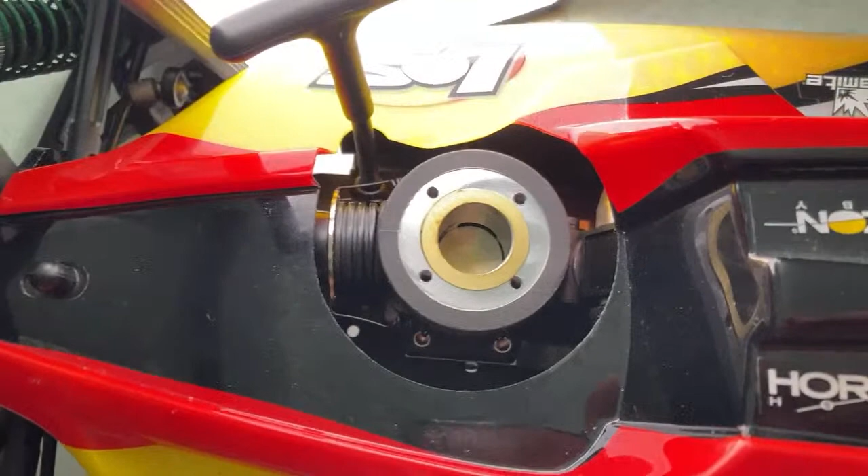All right, so I'm going to add some oil to it now, just because. Here we go.

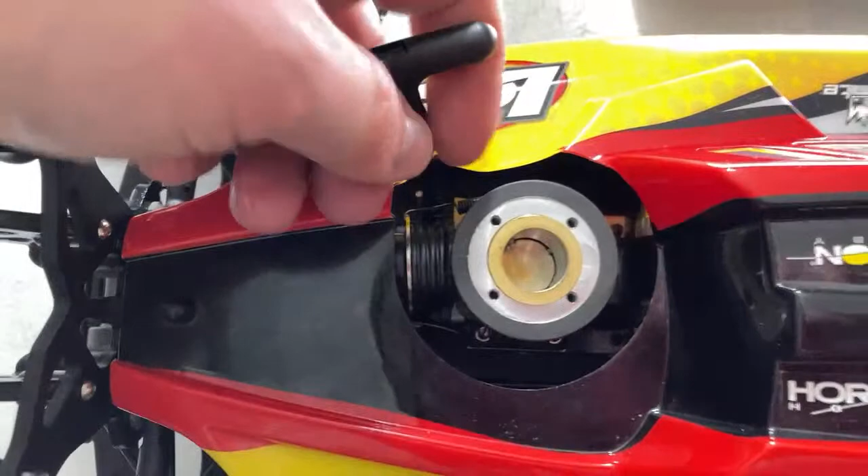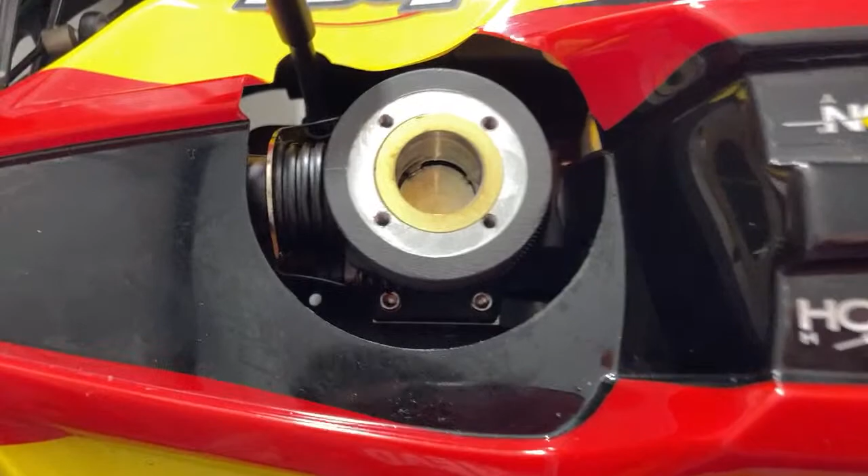All right, that should be adequate. Going to pull it a little bit. Nice, nice. All right, so I'm going to leave it also almost at the bottom there so the ports are exposed, and we'll assemble it back together. And that is really all you need to do. Make sense, guys?

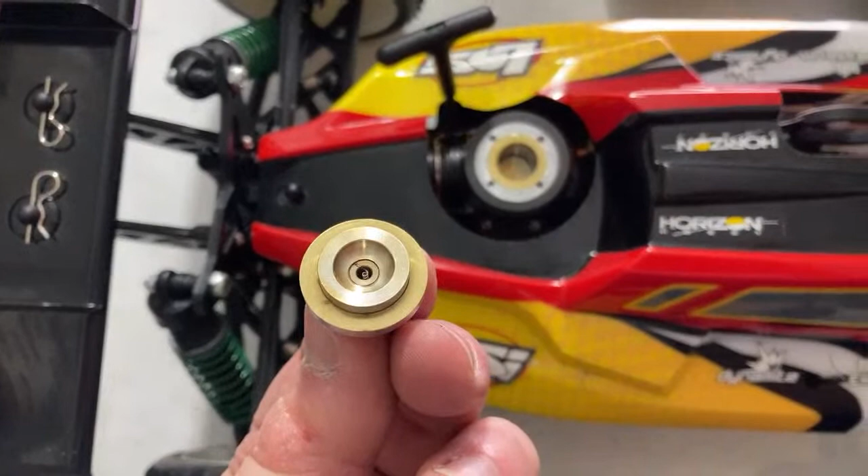Let me look at this head button. Yeah, looks fine. Okay, I'm just going to clean this. Looks perfect. All right.

Bottom dead center, I don't know. Did I say top dead center? Probably said something wrong. So now we're going to put the cooling head back. Yeah, I didn't put in a lot of afterburner oil. That wasn't that much oil. It wasn't like a sickening amount, it was normal amount.

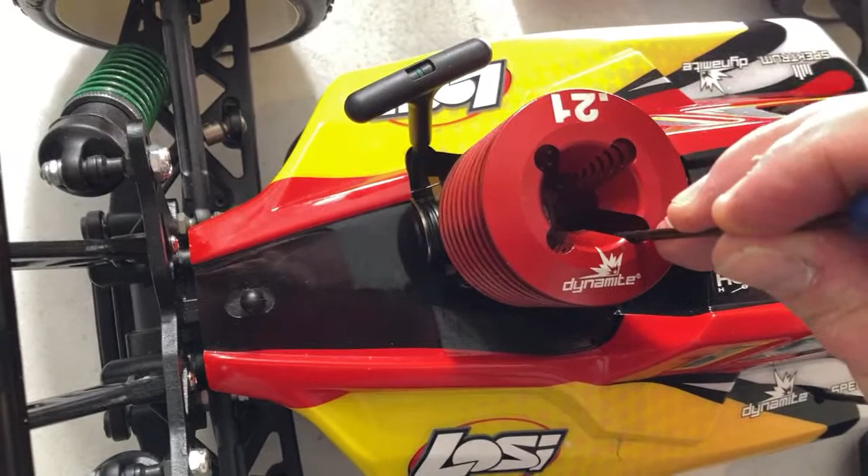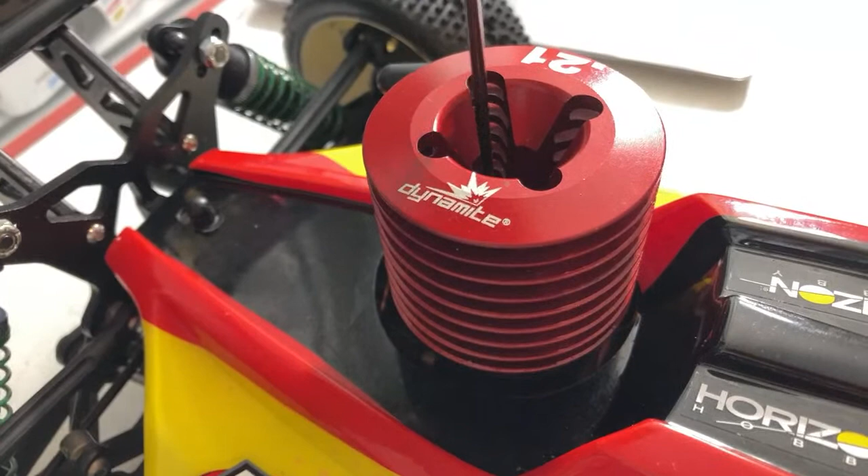All right, so I'll tighten it later. I'm just going to leave it like this for now, I think. Actually, no, you know what? I'm already here, there's nothing to leave. Let's not leave things, we're just going to tighten it, and that's it. I'm doing an X pattern as much as I possibly can here.

All right, almost done. Okay, and we're done. Let's flip back to me here. All right.

Okay, guys, so Losi, right? Should you get one? Well, it's a Nitro, so the answer is yeah, you should get one, you know?